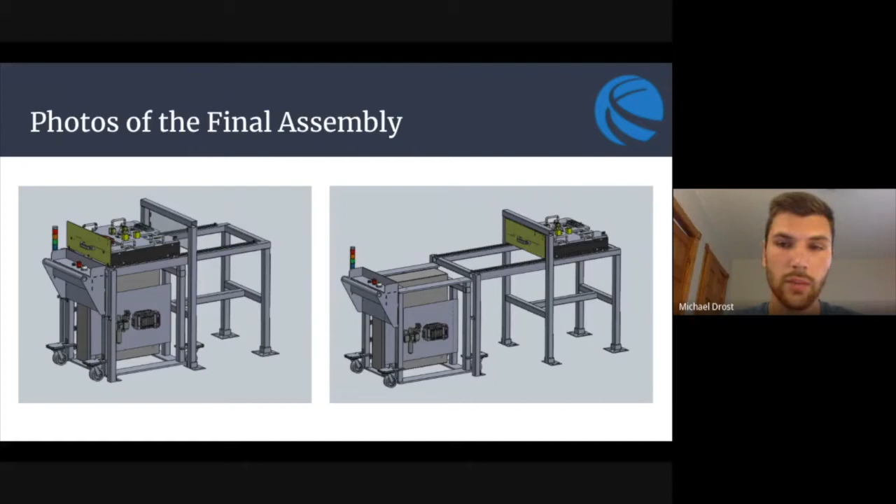able to have a cart where you could move the PLC between the different molding presses and have the insert load station be modular so that you could change it out and use it for different projects. So these photos help show a condensed and more exploded view of those sub-assemblies.

Just a quick cell operation flowchart. The operation starts by having the operator load the inserts into the insert load station. The insert load station or nest then poka-yokes the inserts, and the operator will then push the nest forward into the cell. The robot end of arm tool will come and pick up those inserts using either a 3-jaw

chuck or a slotted pin, and it will place the inserts into a mold and grab parts. While the mold is open, the end of arm tool will place the inserts into the mold, and then when the molding process is completed, the end of arm tool will remove the molded part.

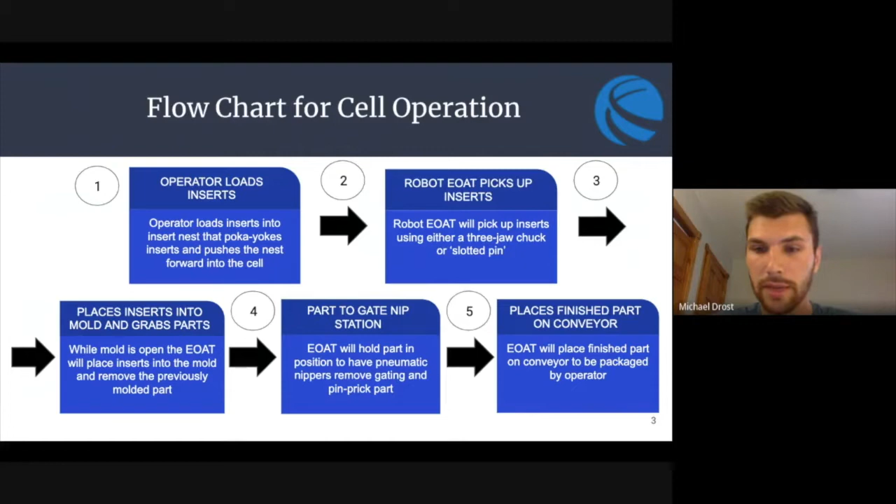It then moves that part to the gate nip station, where pneumatic nippers will remove gating and pin prick the part. The operation then finishes by placing the finished part on the conveyor to then be packaged by the operator.

The current system that Cascade uses is a non-modular setup. This can be seen in the top photo off to the right, and is completely fixed and confined to one molding press. It is not modular, so it can only run one product at a time and can be very time extensive in changing out those nests.

It is difficult to slide the nest back and forth in between or into the cell, and the colored towers are used for poka-yoking the inserts. And some examples of inserts can be shown in the bottom photo, and those are used to be put into the plastic injection molding presses.

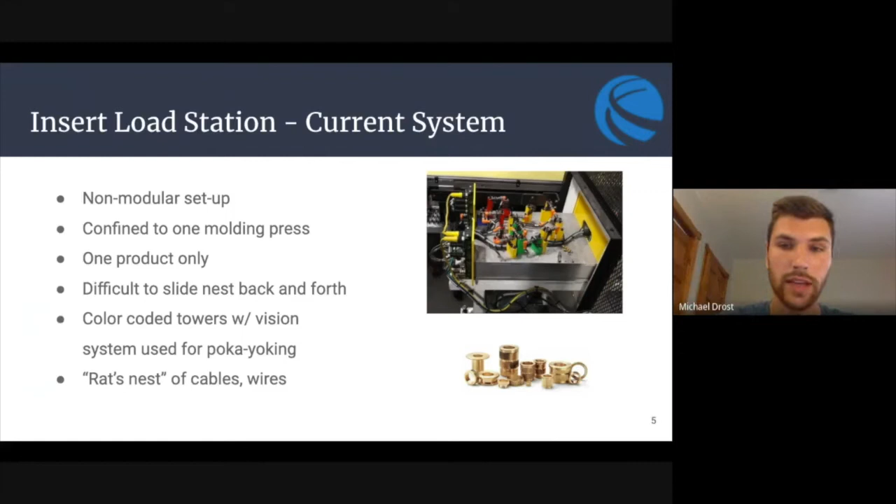The current system also has a rat's nest of cables, which can be seen in the above photo, so they wanted that cleaned up. The current project objective was to design and build a series of sub-assemblies. So the first one is nest fixtures for 2 different products that poka-yoke the inserts.

They also wanted a cage-mounted rail system for the insert load nest to be mounted to, as well as a mobile frame for all PLC components and controls to be mounted to. The last thing was an updated gate nipping station to remove excess material from the products.

The first subassembly that we'll go over is the rail frame, and the key specification for this subassembly was for the system to sustain a 100-pound force load with less than 0.04-inch deformation. They also wanted access to the PLC control panel while it was pushed into the rail frame, and it must accurately locate within the cell.

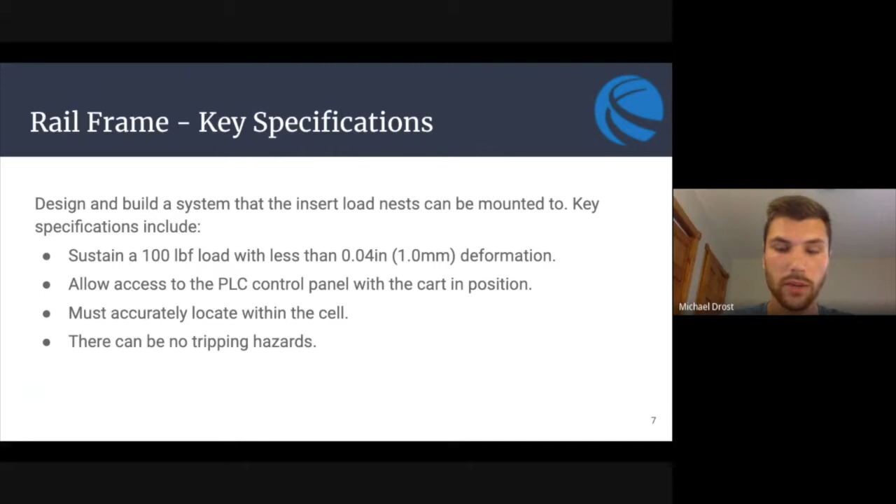There could also be no tripping hazards while the PLC cart was located within the rail frame. This is a view of that system. We can see a couple different components from it, as we have the front supports, which will be on the exterior of the cage. We have the center yoke, which will be coincident with the cage itself. There are also rear supports, all of which are fixed permanently to the ground.

We also have a cable track to connect electrical wiring in between the PLC and the insert load nest, as well as a track support for that and a guide rail along the front of the rail frame to help guide the PLC cart in.

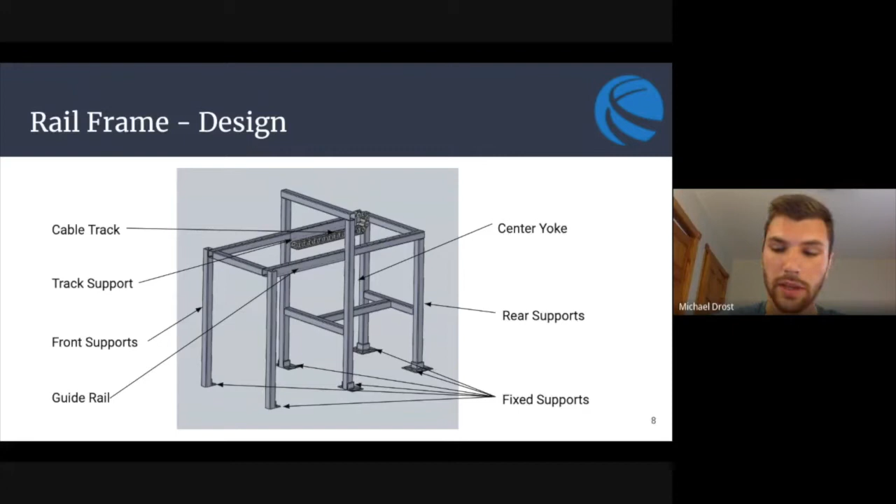So this component is called the base plate and ejector system. It's composed of a series of 3 aluminum plates, which are connected by the 4 linear motion rods shown. This system is permanently fixed to the rail frame shown in the last section and is used to connect the modular fixture plates and allows the user to slide it in and out of the robot area.

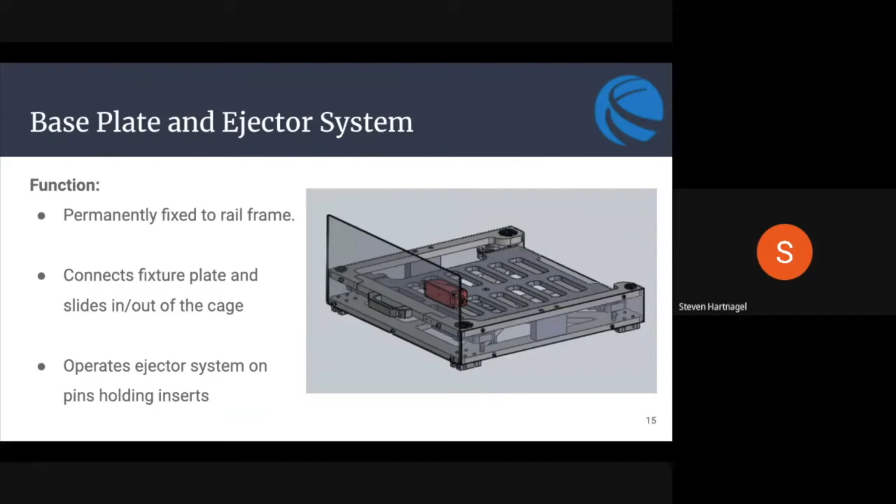This component also acts as the ejector system for the pins which hold the inserts. And then if you go to the next slide, the guide carriages shown on the bottom mate with the rails on the rail frame and allow the user to easily slide it. So based on the calculated weight for the base plate and the fixture plate, it was determined that the resulting force required to push the system into the cage will be about 25 to 35 pounds.

A custom pneumatic cylinder was required for the specific locations needed for the pins, which will actuate the dynamic plate in the middle to 3 separate positions based on the type of insert present. The cylinder has a 32 millimeter bore diameter, so it's going to have plenty of force, and the force can be adjusted on it.

Finally, self-aligning linear bearings are attached to the dynamic plate in the middle, which will allow the plate to ride smoothly on the linear motion rods. And then other features you can see there include the fastener receivers that mate with the fixture plate, the safety panel, and then the solenoid locking mechanism, which is shown in red.

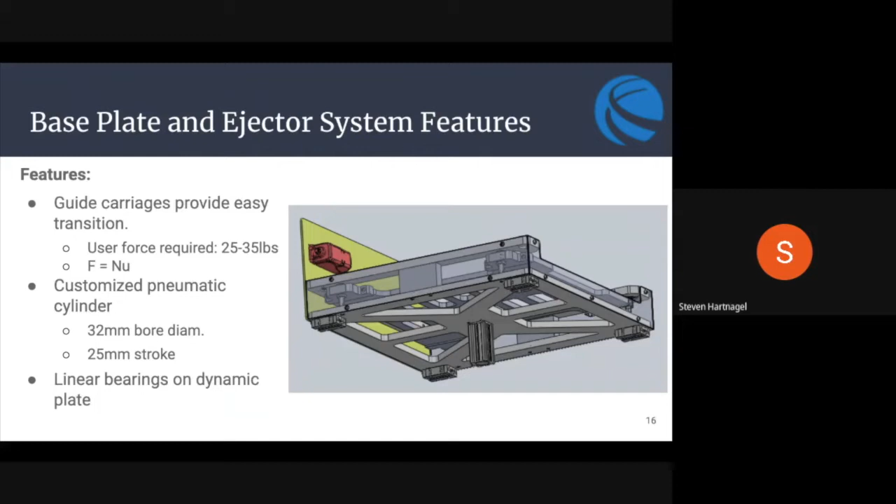The insert load fixture design goal is to build a system where the inserts can be applied to multiple products and allow for quick toolless changeover to make it easy for the operator. Some key specifications include poka-yoking the inserts, so only the desired inserts would go into the fixture.

It had to be repeatable within plus or minus 2 millimeters. Again, to have a toolless changeover. And we had to design fixtures for 2 different products using the same methods. That way, in the future, they'd be able to use those same methods to build more products.

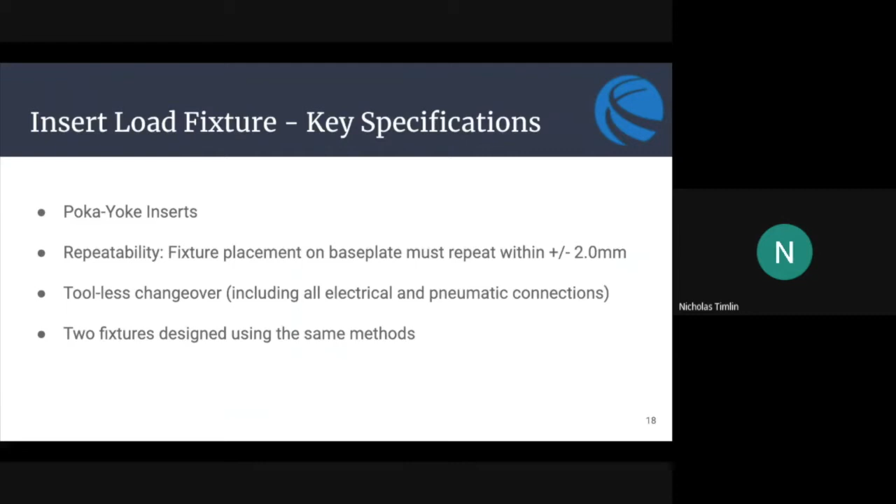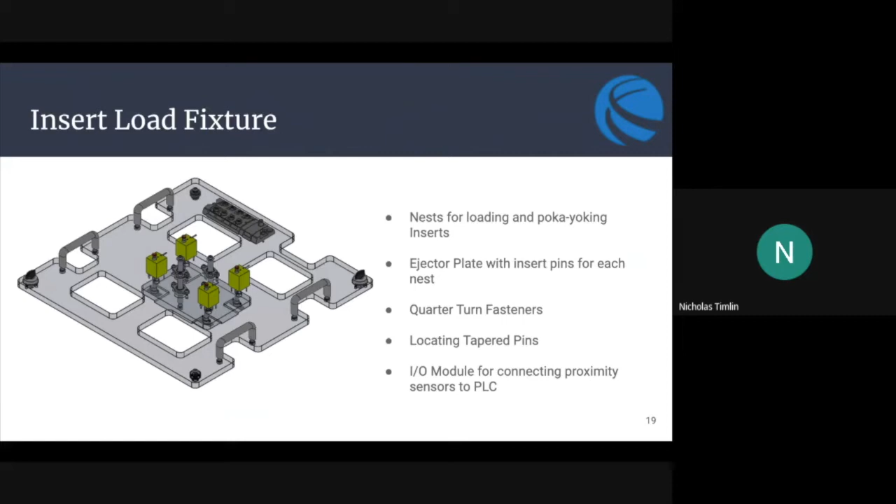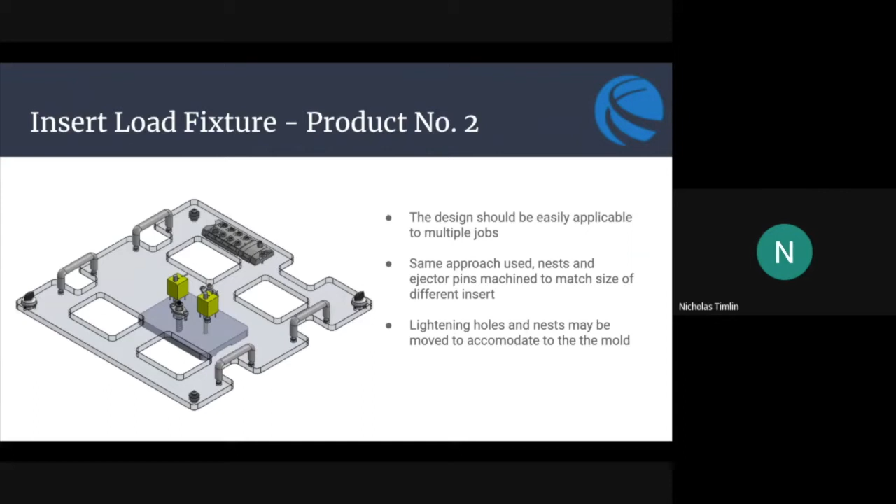And in the back is an I/O module that the sensors would feed into, and that would be connected to the PLC. So then the system would know what product is currently loaded in the machine. Here's a picture of our second fixture that we designed. This product only required 2 inserts, and they were different shapes, so the insert nest just had to be machined slightly different to accommodate for a larger size. We can see that we use the same methods here on a different product.

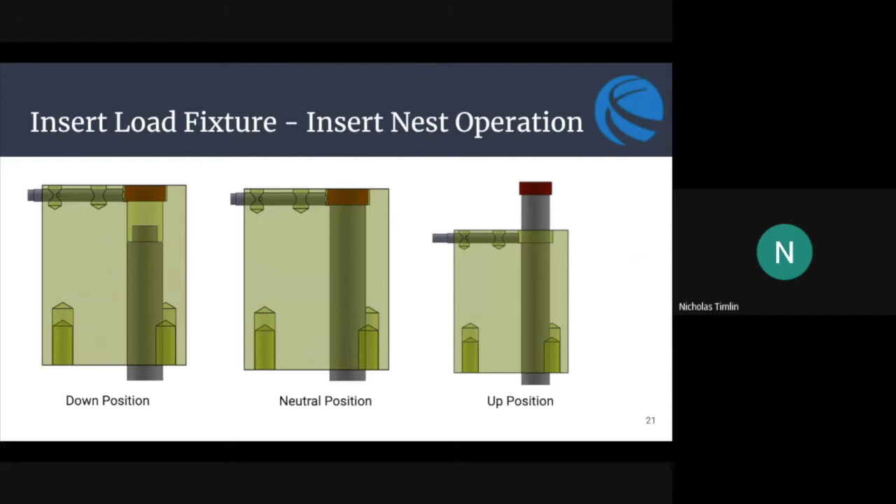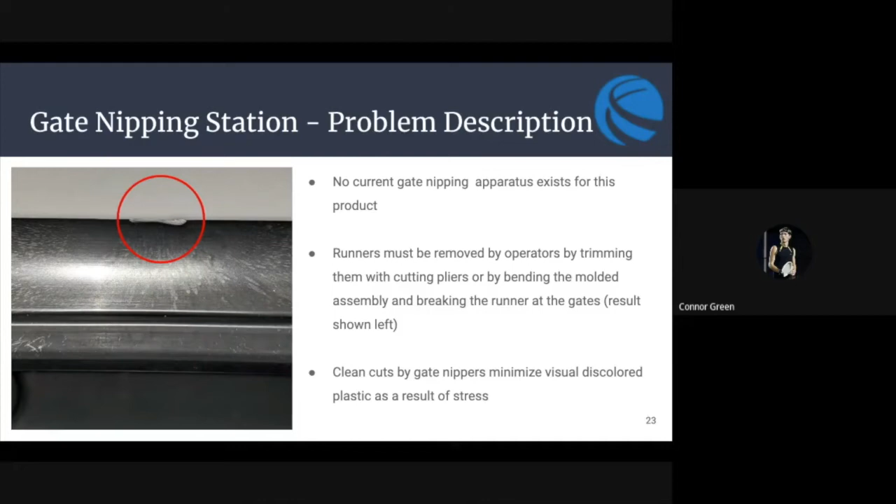And for the gate nipping station, the scope of this part of the project was to design and build a system for the gate nipping nest that can be applied to multiple products and also allow for quick toolless changeovers. As you see on the left, that is a product that does not currently have a gate nipping apparatus for it. A runner, which is where that would be attached, would be removed by operators using cutting pliers or bending the molded assembly and breaking the runner at the gates, which is that location. And as you see, that is a visible defect that some customers may not prefer to see. And clean cuts using the gate nippers minimize the visual discolored plastic as a result of the stress.

Key specs about the gate nipping station. The weight of the plate itself must be less than 20 pounds. Repeatability: the plate must be able to be placed onto the tower within 2 millimeters. Toolless changeovers for all electrical and air lines that are supplied to the gate nip station, and the runner must be cut at the gate, leaving little to no additional plastic on the final parts.

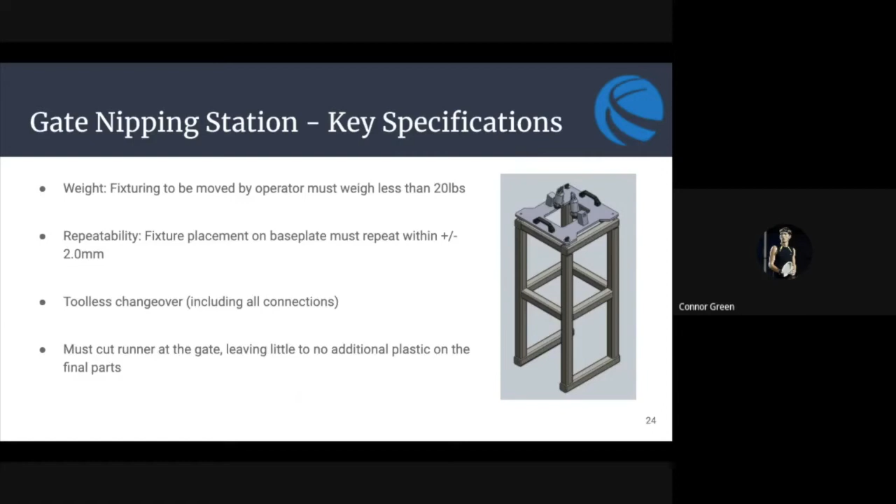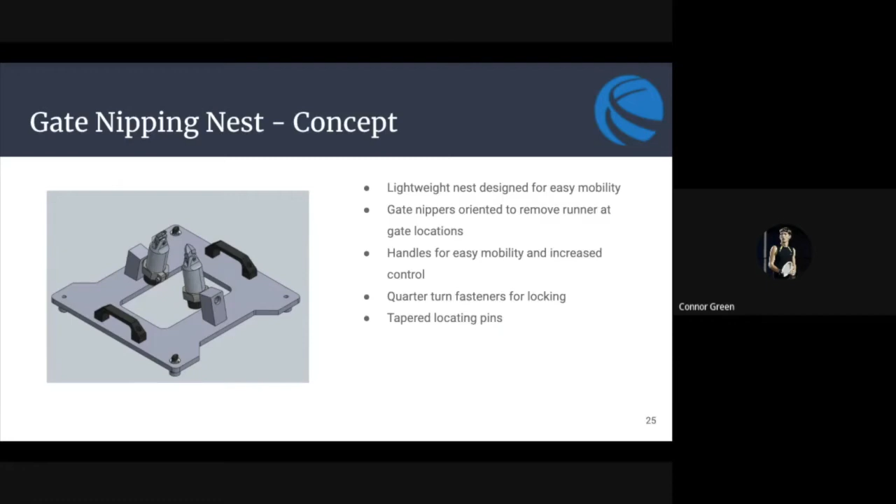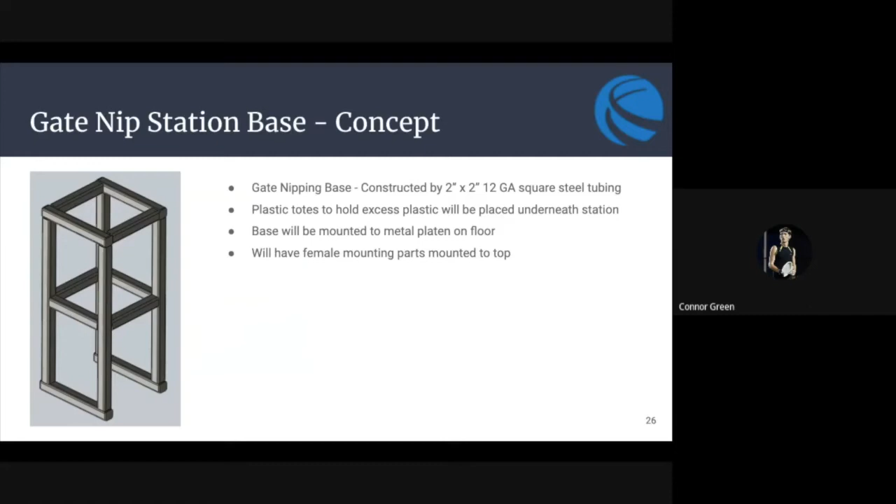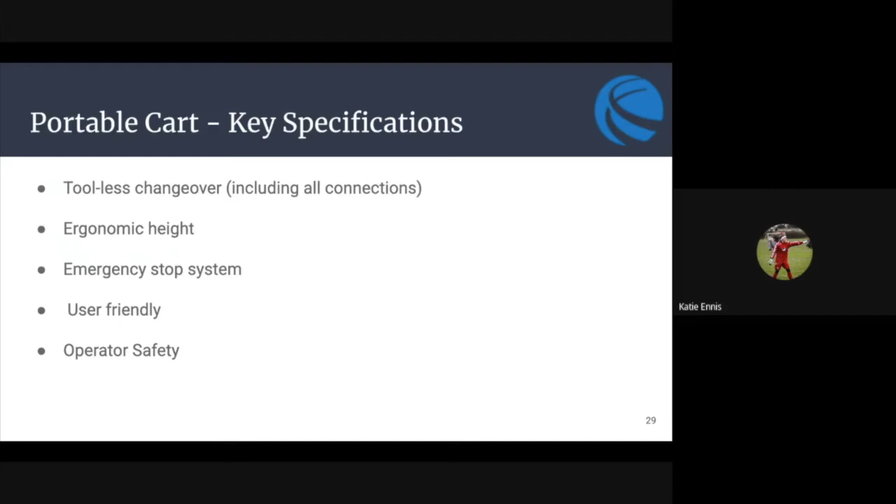Next, we have the portable cart, also known as the PLC cart. The main problem description is to design and build a portable cart that moves key components from cell to cell based on the demand of the products at Cascade. Some of the key specifications for the cart are to have a toolless changeover, including all connections, have an ergonomic height of around 40 inches, an emergency stop system, be user-friendly, and also take into consideration operator safety.

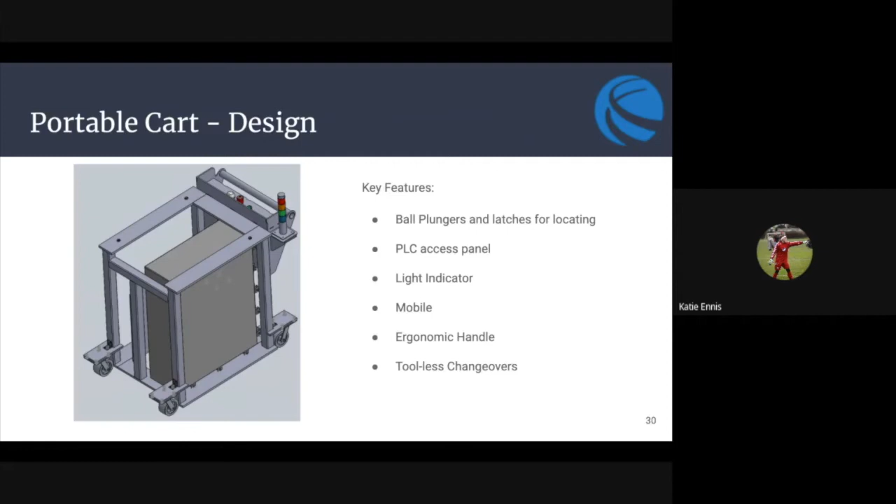Here on the left is the design we came up with for the portable cart. Some of the key features are 3 ball plungers to help locate within the rail frame. There's the PLC access panel, a light indicator, it's mobile, an ergonomic handle, and a toolless changeover.

Here's the control button assembly. So button wiring will be run through the 2 holes, as you can see in the far left picture behind the plate. There's the light signal with wiring clips to help maintain wiring throughout the assembly, and then there's the light signal indicator to tell the operator what is happening when loading and unloading the inserts.

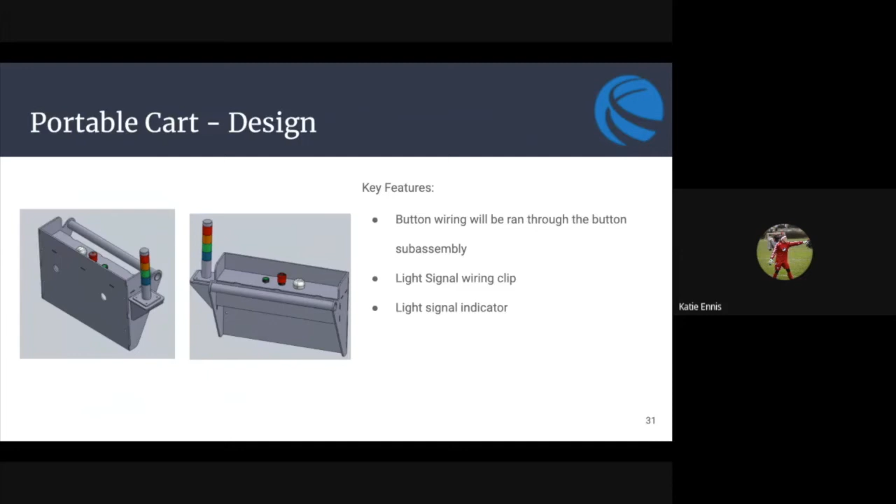So the next subsystem is the controls, and the deliverables for the controls were to fully design a control system for the insert load station and the gate nip station, a complete PLC program, state diagrams for both stations, complete wiring and pneumatic schematics, as well as a bill of materials and quotes for all controls related components.

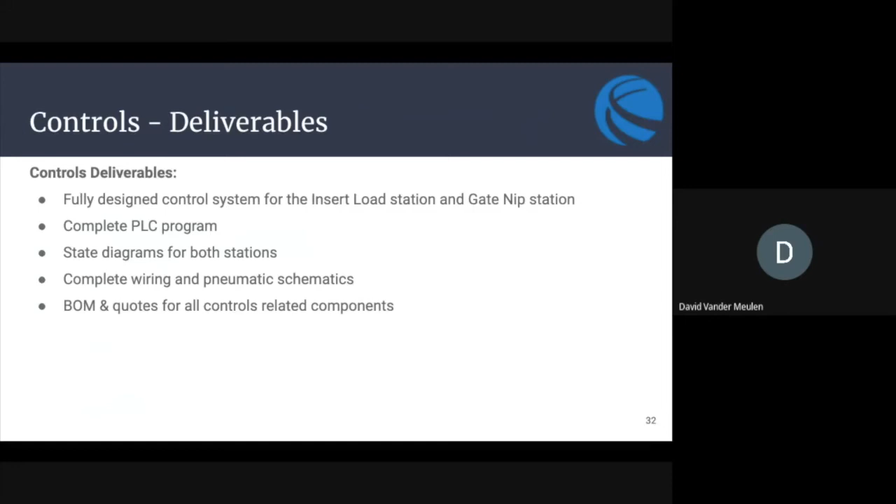The key specifications for the control system were that the machine had to be integrated with the control panel and an Allen Bradley PLC. The PLC had to be able to control both the insert load station and the gate nip station. It also had to be integrated with a method to automatically detect which product is running based on the current nest that was installed. It also had to be able to error or indicate to the operator when an insert was loaded incorrectly and they tried to run the machine.

They also had to have a one-touch e-stop button for safety. It also had to have 16 usable inputs for the poka-yoke sensors for the inserts, as well as have 16 usable control valves on the valve bank for the gate nippers.

So the main considerations for selecting a PLC were the number of inputs as well as the number of outputs, and whether or not those inputs or outputs are analog. In this system, it's a completely digital system, so there were no analog inputs or outputs, which made selection of the PLC a little bit simpler. In this case, we went with an Allen Bradley CompactLogix PLC. This is a PLC that Cascade Engineering was already familiar with.

This specific model has 16 digital inputs and digital outputs already embedded into the controller, which allowed us to connect the majority of our needed inputs and outputs into the controller directly. Since there are more than 16 outputs, however, we did need to install an expandable output card onto the PLC itself, as you can see on the lower right hand part of the screen.

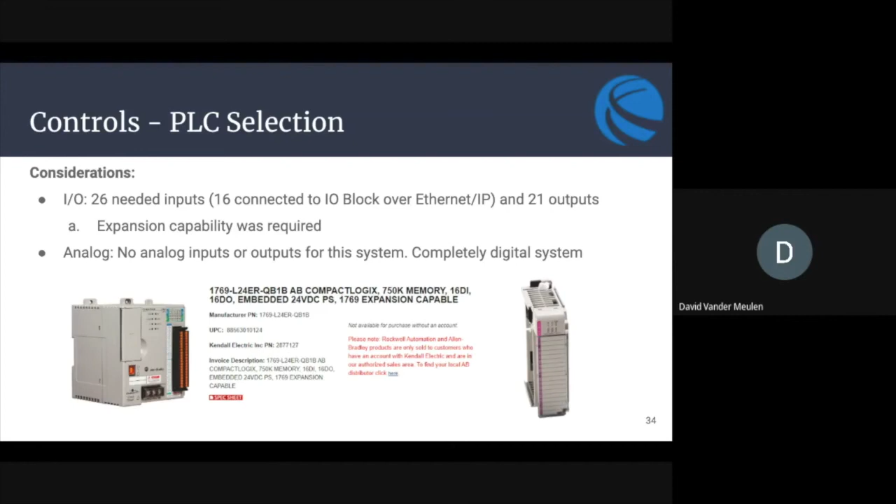For the IO-Link modules, one of the specifications was to figure out how to have the PLC automatically know which product was loaded or which product nest was loaded. And the way we're doing that is by using a Balluff IO-Link sensor junction box, and each one of the nests will have its own individual unique sensor junction block. And this sensor junction block will be used in conjunction with an IO-Link master.

The master will be installed in the control panel, and then the sensor junction would be connected directly to the master. And since the sensor junction block has an application specific ID number that can be written to it and read from it by the PLC, whenever you plug in a new sensor junction block, the PLC will be able to read that application specific ID number and therefore know which plate is installed currently.

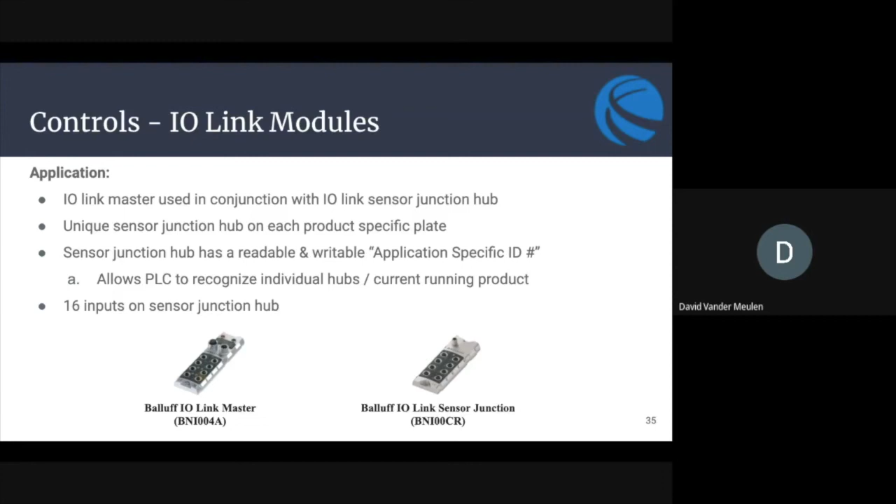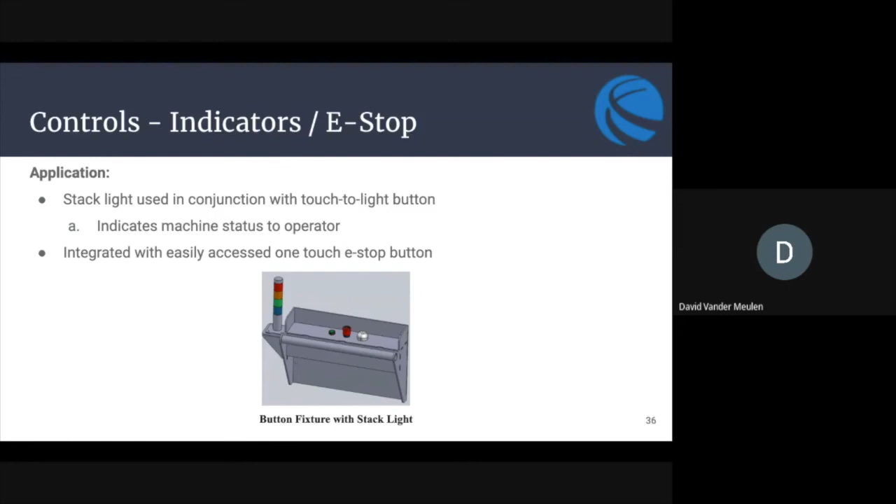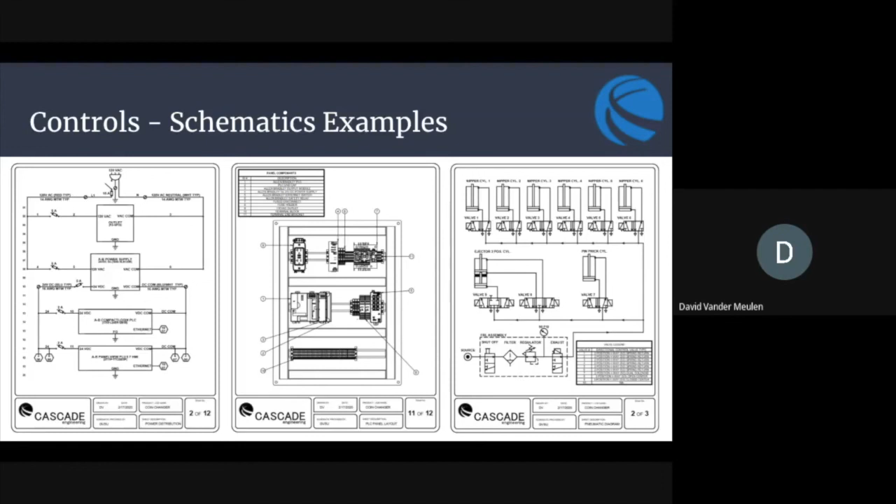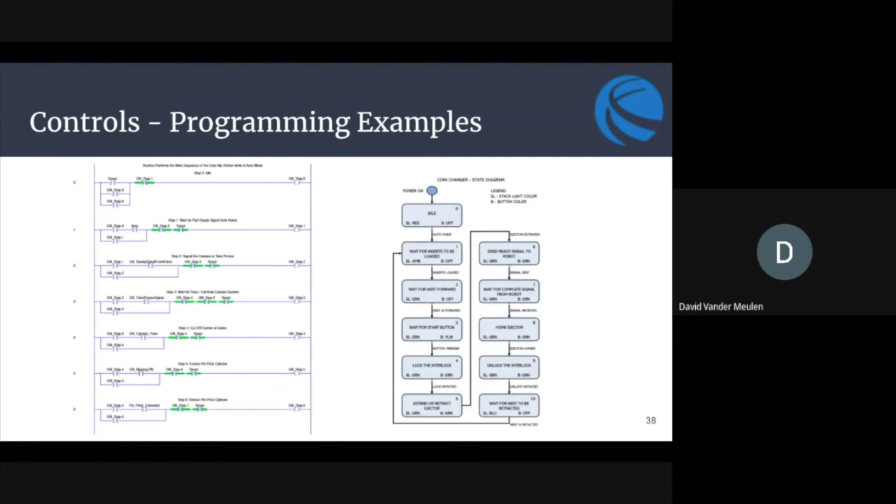So some of the project modifications that were made due to COVID-19 include working remotely. We all had to communicate over software such as Google Meet. We also were not allowed to build the actual machine due to hazards of COVID-19. That part of the build will now be performed solely by Cascade Engineering.

A large part of the scope of work that was altered during the second semester of our project was to accommodate much larger molded pieces. And that included us changing our design to accommodate a much larger area for inserts to be loaded. It was a 12 by 12 inch area that you could potentially have inserts loaded. Now it is 22 by 22, and changing a lot of the design for that.